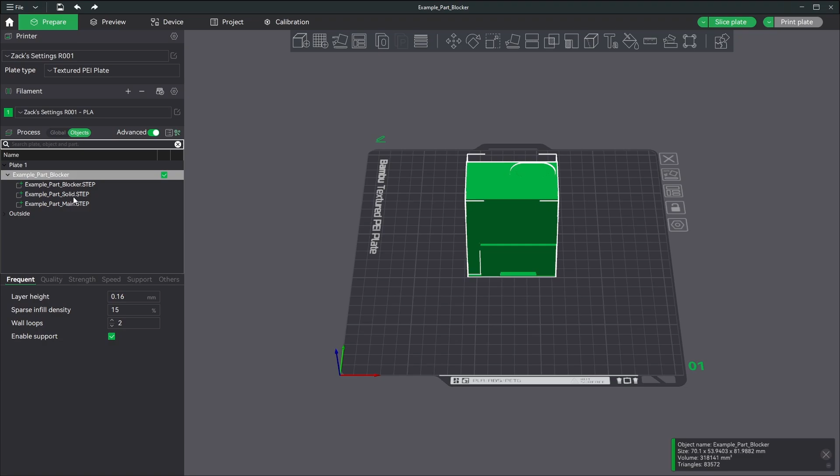They're all under one part. The first object is a blocker, so I right click on that and say Change Type, then Support Blocker. Support Enforcer kind of does the opposite. I prefer Support Blocker. They seem to work better.

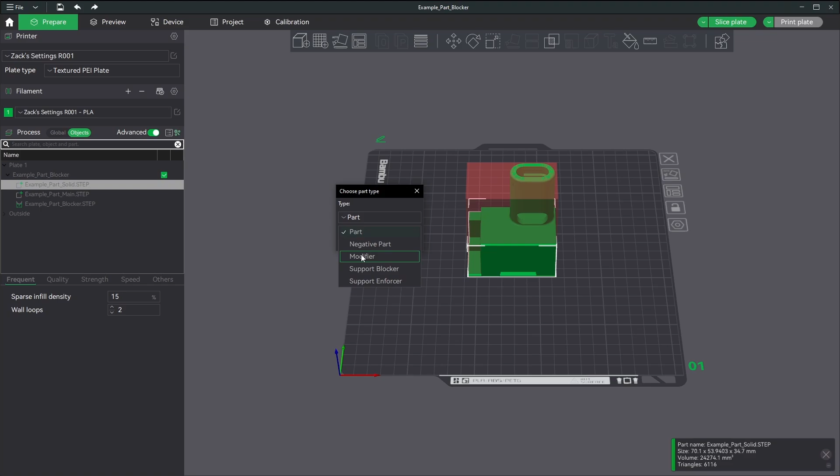The second thing is a solid, so I'm right clicking on that, Change Type. I'm going to set that to be a modifier and set that to be 100%.

So what I've just done is I've told the program I do want support, but not anywhere that this red bit is, which is almost the entire part, except for this little area down here. I just want support down here.

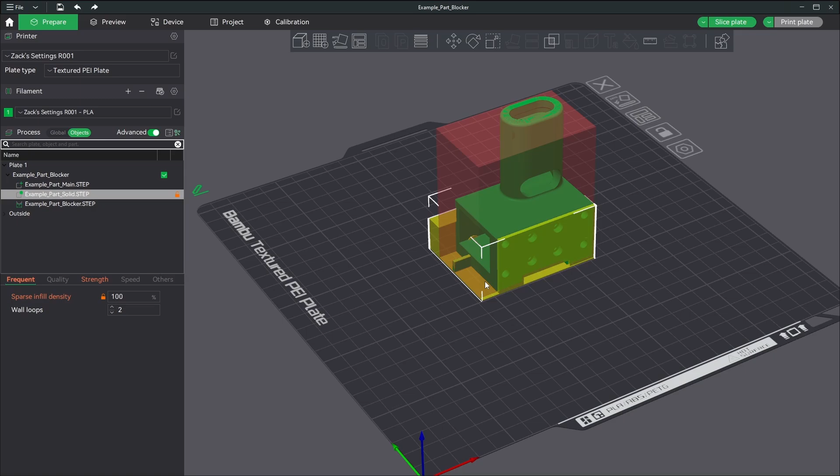The second thing I've done is I've said everywhere that this yellow thing is, I want to be printed at 100% density for strength. Everywhere that it is not, everywhere in this green part that is not covered by the yellow, is going to be printed at 15% density for lightweight and material savings. So that's basically all I have to do.

I click Slice Plate now. The program does some thinking for me. Normally it'll come in like this, but sometimes it remembers what you were doing in the past.

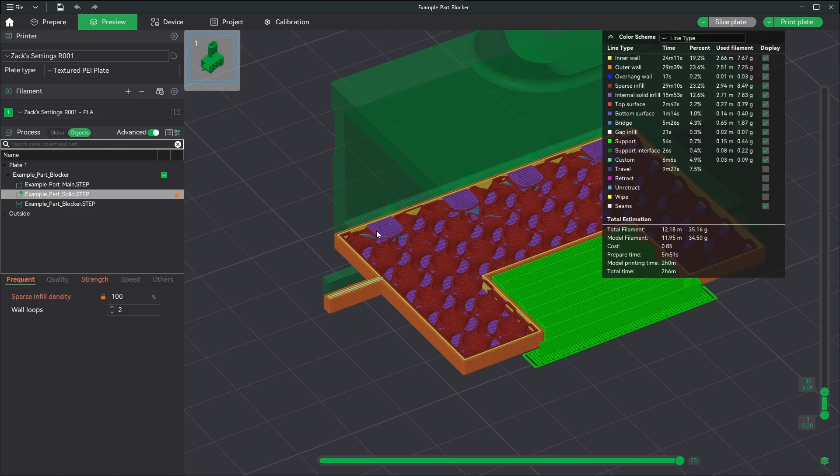So down here you see I've got my support material that I wanted. And down here you'll see that these areas are printed at 100% density, just like I wanted as well. But up here, I've got no support material because I blocked it, because I did not want it.

So then I can just basically print the plate at that point. But I want to show you just a couple of other things real quick.

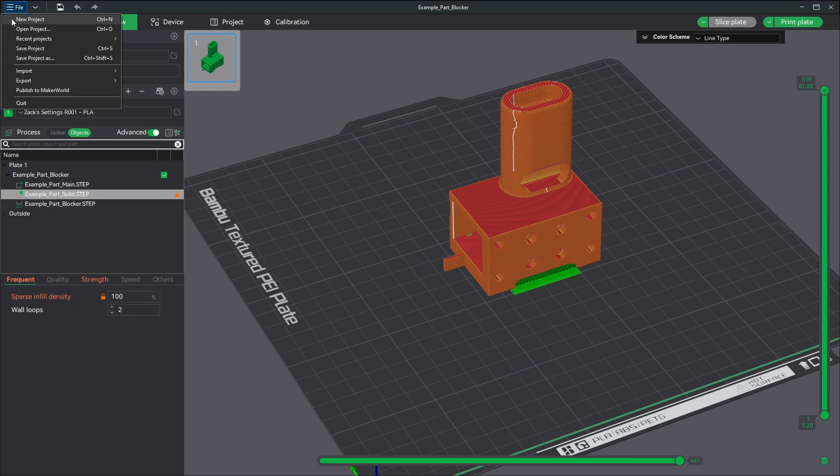So I'm going to do a new project. I'm going to say File, Import, Import. And this time I'm going to import this just single part. So this, I exported from the program all three of these, but in a single file.

So in this case, you see, I've got the same parts. The difference is, first of all, it didn't ask me a question. Second, it's a little bit easier to manage one file versus three. Third difference is that when I import it like this, I don't have the names.

So I've got three things here. It's not a big deal. If I was importing something with 80 things, and I've got to go through and find which ones are modifiers and blockers and so on, that's going to be more frustrating. So the lack of names is frustrating, especially since the file imported does have the body names. This program just ignores them.

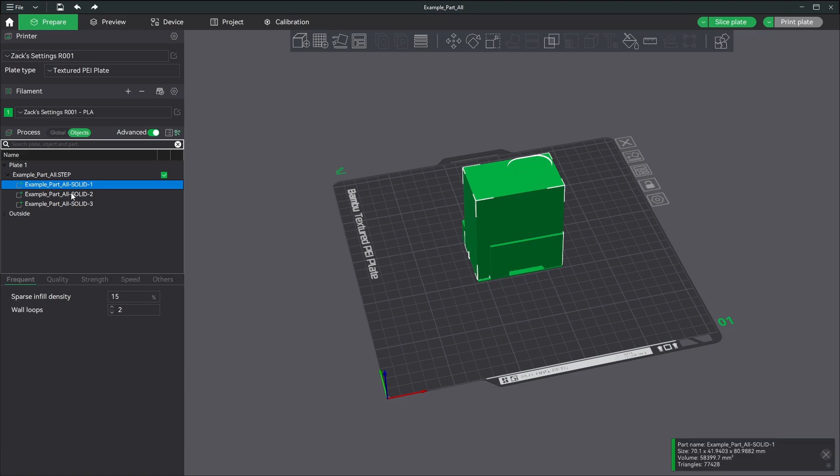The final thing is that sometimes when you import a part with multiple bodies in a single file like this, Bambu Studio gets confused and something breaks. It doesn't happen often, but it does happen sometimes. So generally, if you can, I recommend importing the three separate files. It just makes life easier and it's more reliable.